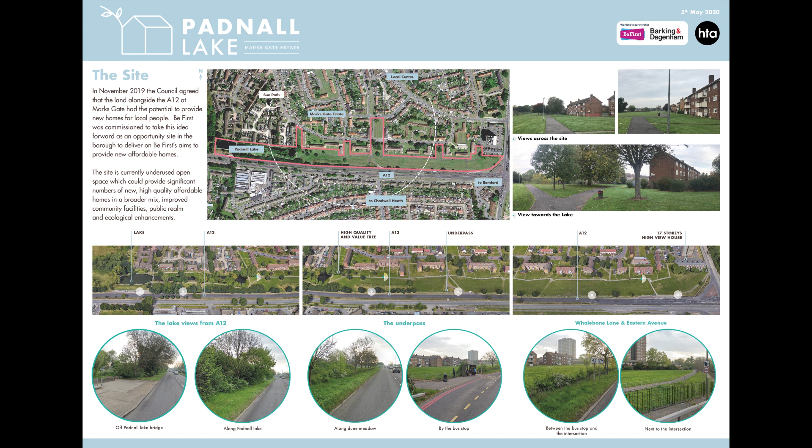BeFirst were commissioned to take this idea forward as an opportunity site in the borough, delivering new high-quality affordable housing with shared residence space and improved public realm. BeFirst has engaged with the local community, working closely with HTA Design since December 2019.

We have been talking with local residents and key community stakeholders to gather ideas and share information about the development plans for Padnall Lake. These have included stakeholder meetings, a meet the team session, resident workshops, school workshops, public consultation, and coffee mornings.

Following our successful events and workshops with local residents, stakeholders, and Rose Lane Primary School, we gained the following feedback, ideas, and insight: provide additional housing, ensure safety and security, provide play spaces for all ages, and create better quality cycle and pedestrian routes through the site, increasing connectivity to Chadwell Heath.

The priorities of our proposals for the Padnall Lake site are to provide 100% affordable housing, to make the underpasses and their approaches safer, to enhance the area's open spaces with new opportunities for play and biodiversity, to offer high-quality sustainable homes, and to create new and improved pedestrian and cycle routes.

Our vision is to provide an extension to Marks Gate where people and nature come together. Our proposals will enhance the neighbourhood by improving spaces for biodiversity, play, walks, sport and cycling, all while creating a safe setting for new and existing homes.

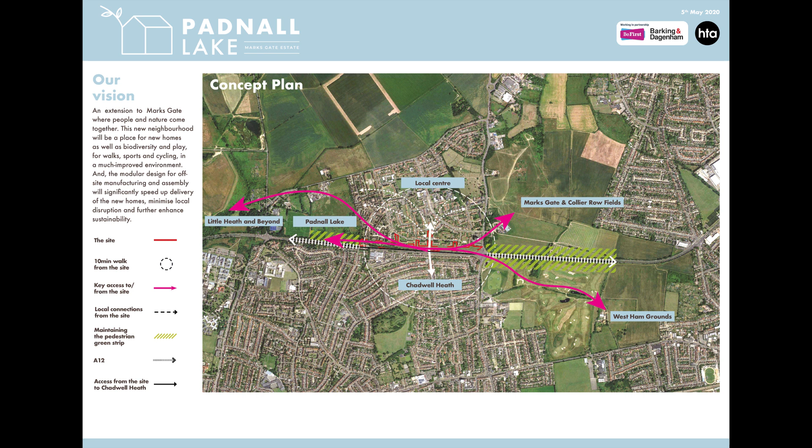Hello, I'm Anna and I'm one of the architects. As a result of the context and technical analysis, we've identified the urban design constraints and opportunities which guide our master plan proposals. We aim to create a continuous development along the A12 to reduce the impact of noise and air pollution. We want to maximize the public open space and improve the landscape quality.

We aim to better the north-south link to improve the site's accessibility towards Chadwell Heath Station and to Marks Gate Centre. We aim to create a passive security with marker blocks on either side of the central subway link.

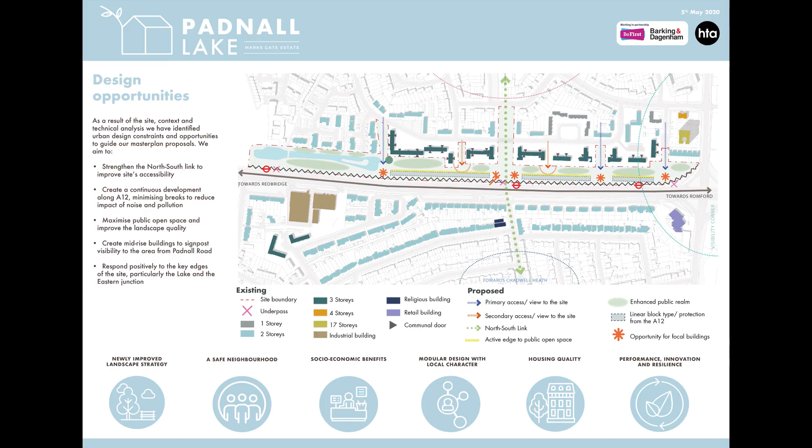The current master plan incorporates analysis discovered through extensive research of this site and of the locality. We are proposing approximately 250 new homes, with a mix of 1, 2 and 3 bedroom flats and family houses. And the buildings are all aligned in the southern edge of the site.

This is to maximize the public open space. A new vehicle road proposed to the north of the buildings creates an active public zone parallel to the open space, and the linear park runs through the whole site from the junction to the east until the lake by the west.

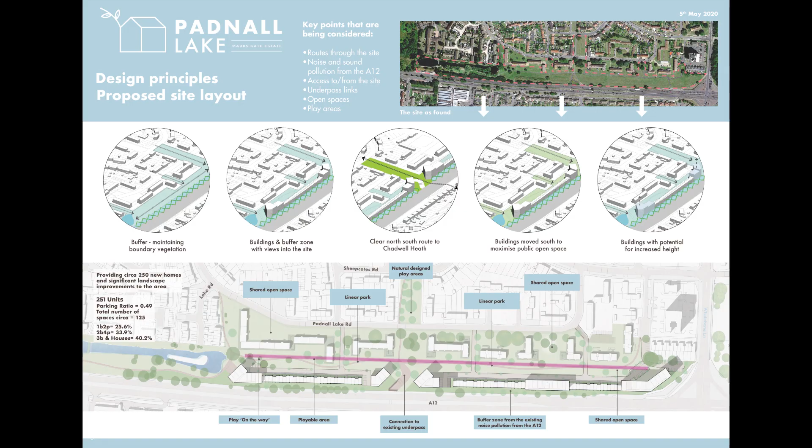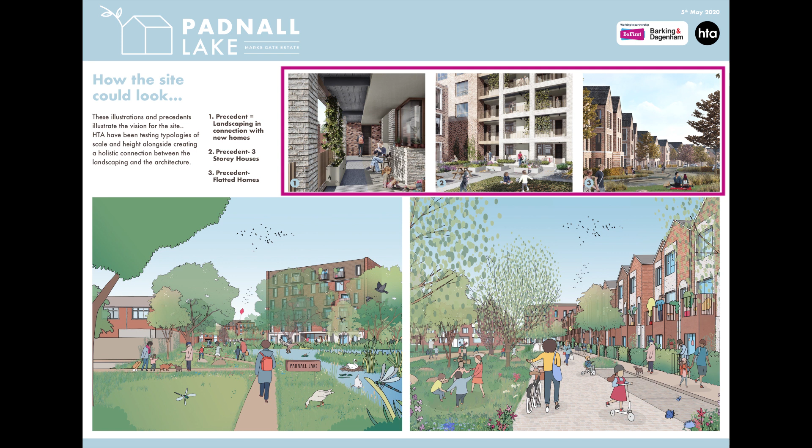Hi, my name's Emma and I'm one of the landscape architects working on Padnall Lake. The following images represent the landscape proposal for the site, which are made up of three key elements: the linear park, the lakes, and the streetscape. These three aspects will seamlessly flow together to create a healthy and vibrant environment.

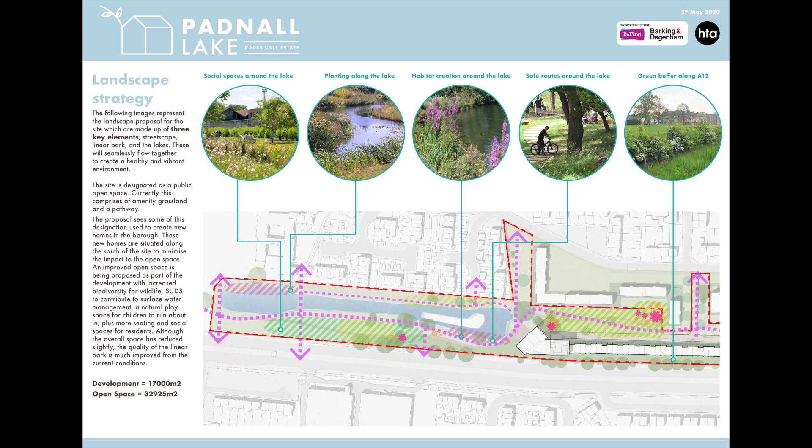The site is designated as a public open space and currently comprises amenity grassland with a pathway running through. The proposal sees some of this designation used to create new homes in the borough. These new homes are situated along the south of the site to minimise the impact to the open space.

A new linear park is being proposed as part of the development, with increased biodiversity for wildlife, sustainable urban drainage to contribute to surface water management, a natural play space for children, with seating and social spaces for residents.

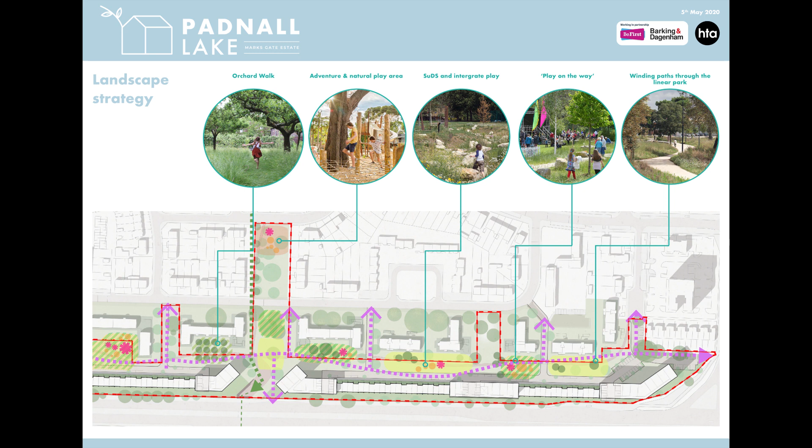Padnall Hall Estate was built around the early 1900s and was a working farm with an extensive orchard, which covered the area where today's Padnall Lake is found. There are some existing apple trees to the southeast of the lake, which are believed to be the last remnants of the orchard. The landscape is drawing on the site's historic past by proposing fruiting trees in the tree planting palette and orchard walks to be included in the linear park.

In addition to commemorating this historical context, the landscape is providing improved pedestrian and cycle paths around the lake, as well as play and seating areas for residents to enjoy.

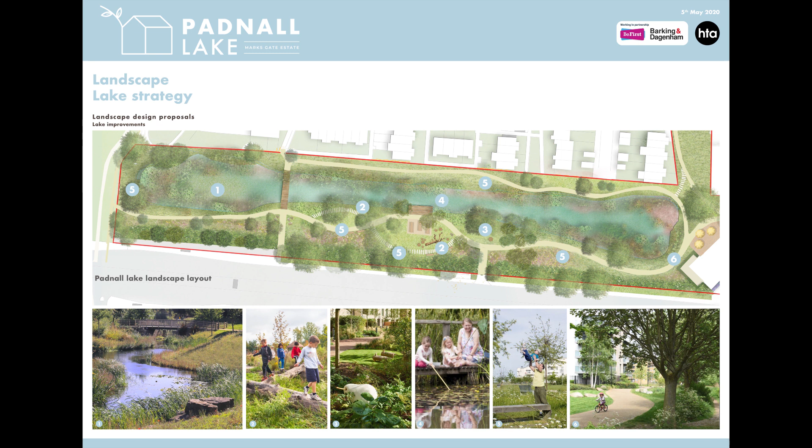At the northern edge of the site is an existing parcel of flat park area with Padnall Road cutting through. This is where an adventure and natural play area is being proposed, as it sits in the middle of the site and is easily accessible to the wider community.

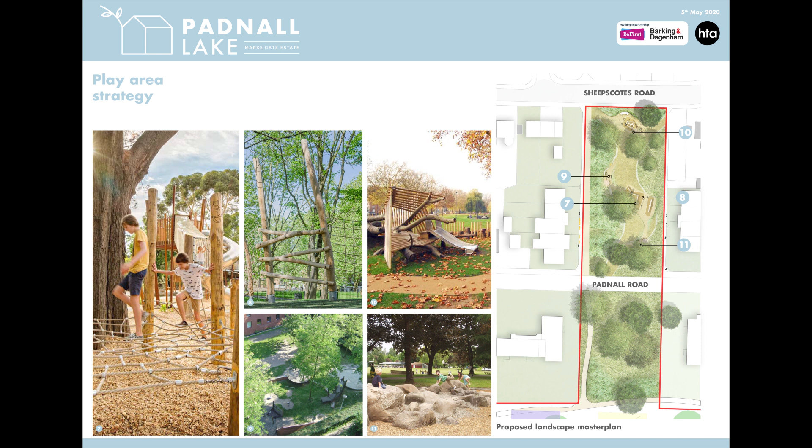The play area will offer exciting and challenging equipment and installations for children to explore and socialise on. It will also connect into the linear park and play on the way trail.

Following a detailed outline of the proposal to date, here is a summary of the key benefits this proposal will bring to the community: more housing, a new public realm, improved connectivity, improved biodiversity, improved play areas, and an enhanced sense of security.

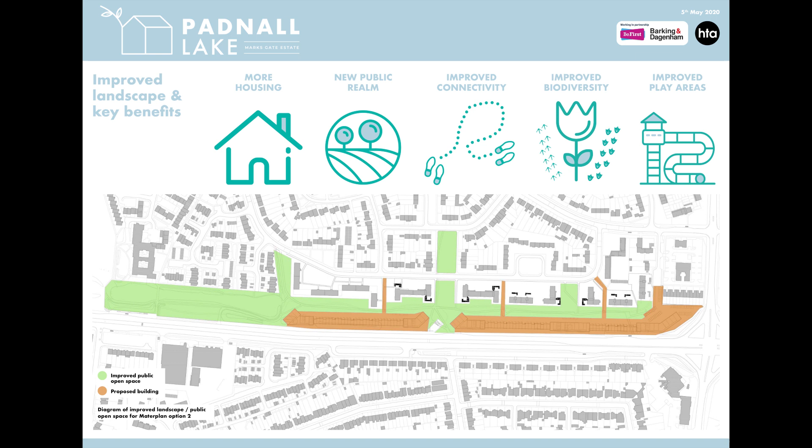Hello, my name's Andy and I'm in charge of the engineering team, including transport. The development will provide parking for resident vehicles at a ratio of around 0.5 per dwelling, inclusive of adequate blue badge parking and infrastructure for electric vehicle charging.

No visitor parking is currently being proposed, as visitors will be encouraged to use public transport, though surveys of surrounding local streets are currently being undertaken to understand the existing parking situation and see if there is any residual capacity within them. Cycle parking will be provided in line with London Plan standards.

Off-site construction reduces disruption for existing residents, as the homes can be built in less than half the time of traditional construction, with a 70% reduction in the number of builders on site and a 90% reduction in the waste created on site. It also has advantages for the environment, with 20% less pollution from construction vehicles and 30% less energy used in constructing the homes.

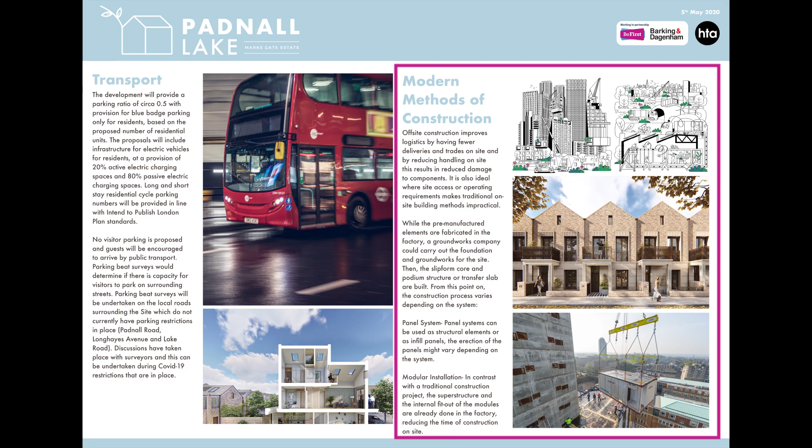Finally, it has many benefits for residents of the new homes, including a dramatic reduction in building defects and a reduced running cost. Thank you for listening to this presentation.